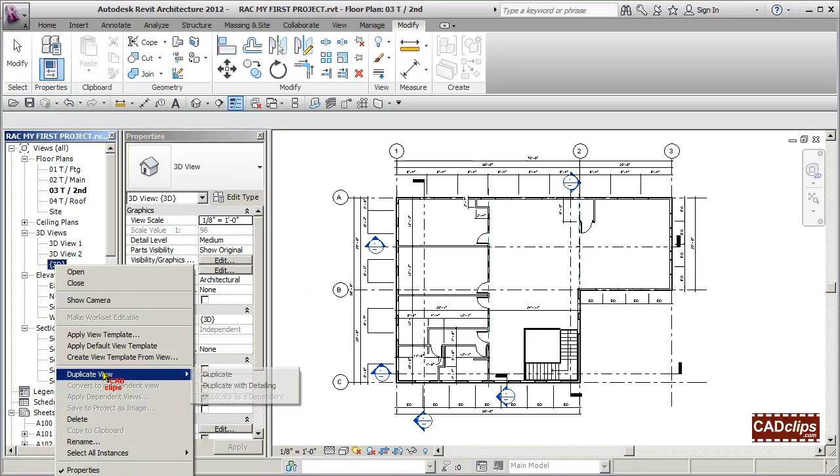We'll right click on this 3D view and say duplicate, just a regular duplicate, and it creates a copy. Let's make another one—duplicate, duplicate. I'll rename this one 3D main floor, which is great for structural and anything else. Really neat stuff. We'll rename the other one 3D stairs. If you double click to open them, they're just like the original view.

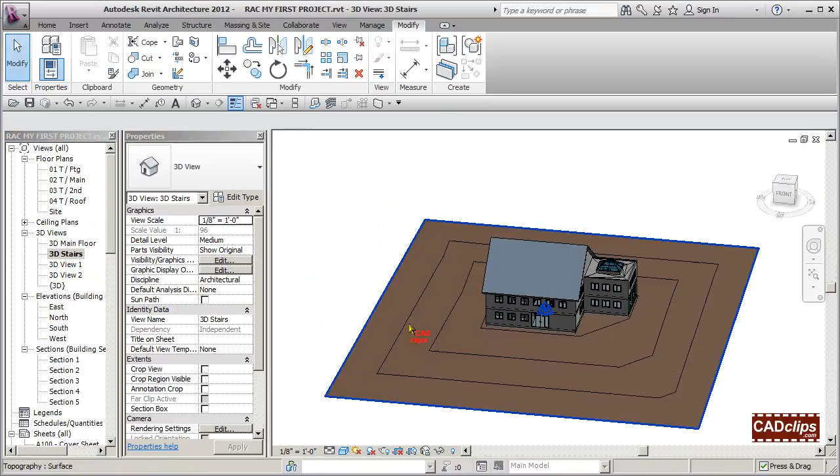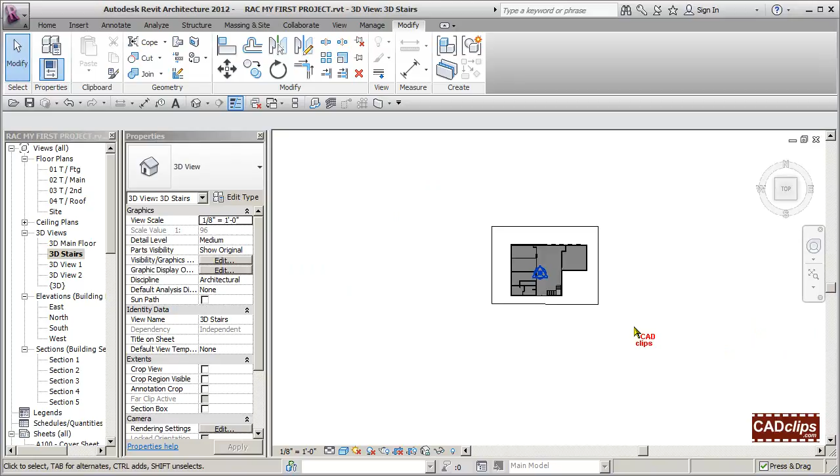Once inside, go over to your view cube, and right on the side there's a sneaky little context menu button. Click it, slide down, say orient view to, then in the flyout say floor plan, and then main floor—watch what happens. Click, and it creates a 3D view of your first floor plan. This is a good way of seeing where your view range is, although it cuts higher than your cut plane, but basically it's a 3D view of your first floor.

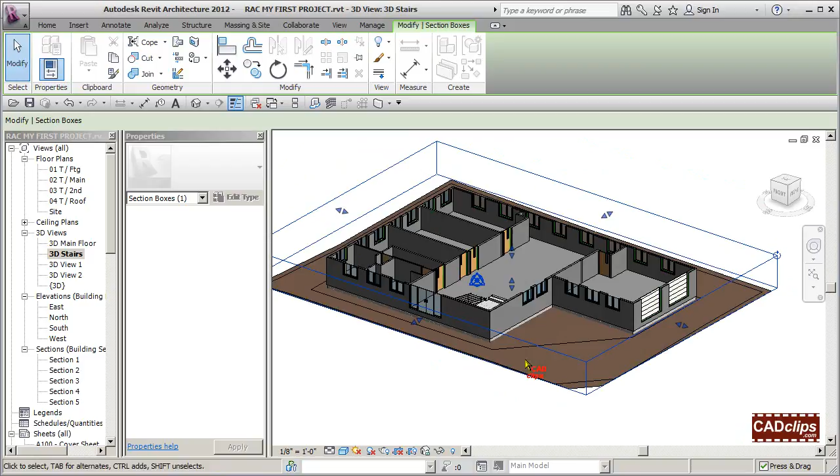Once you have that, you can click on the section box and pull it up and down—it's kind of tricky, sometimes you have to use your tab button. While inside here, it's good to turn certain categories on and off, so I might pick this topo surface and hide the category. Then I can see a bit more, and maybe pull this down to see the foundation, or down to where the beams are. We'll have a follow-up lesson where we'll frame this.

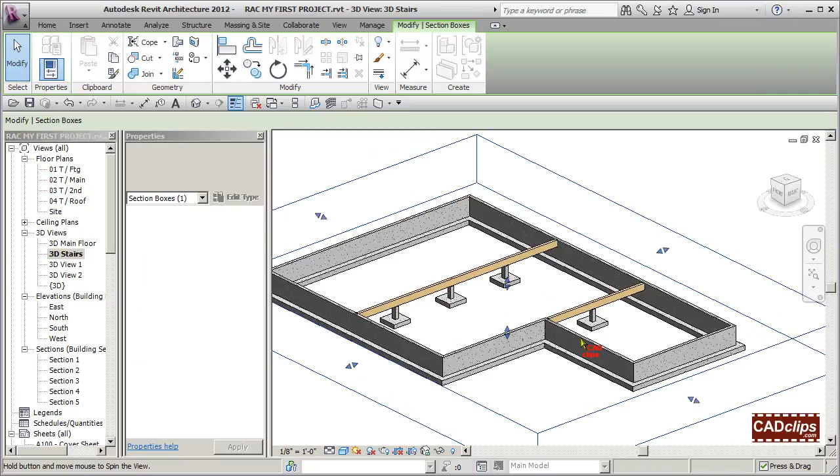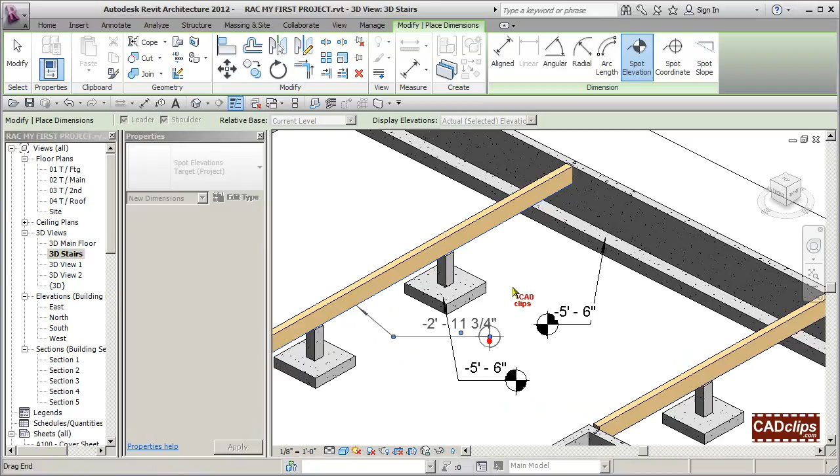You can take this and put it on a sheet. You can also go to annotate and put a spot elevation, marking what elevation this is at, like -5'6", underside of beam. I wouldn't do top of beam because it's probably being clipped, but I'd make sure to pull this up a bit. That'd be kind of tricky—I think that is the top of the beam, so let's go in and find out.

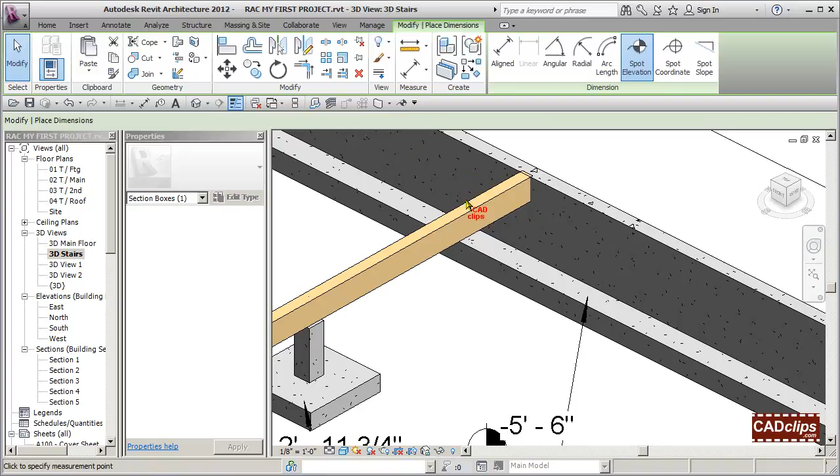Watch—annotate, take our spot elevation, add it to the quick access toolbar, and say top of beam spot elevation. It's not finding it, so it probably is being clipped. I'm actually glad it won't do that, but if you wanted the floor system etc., there are other ways to achieve this.

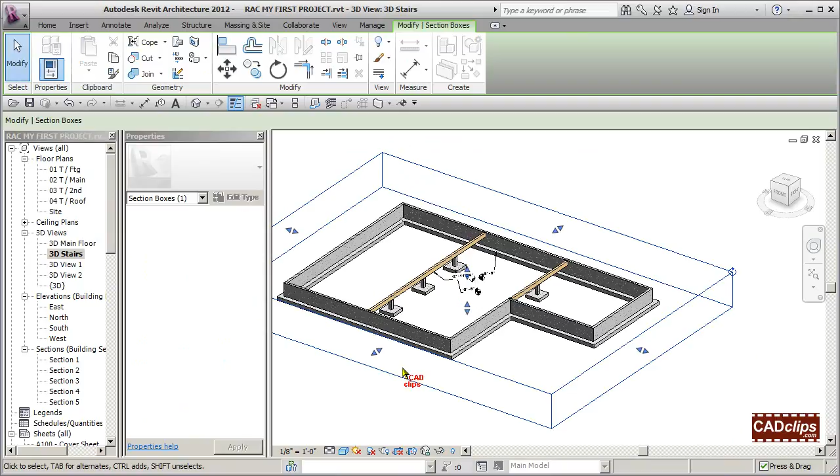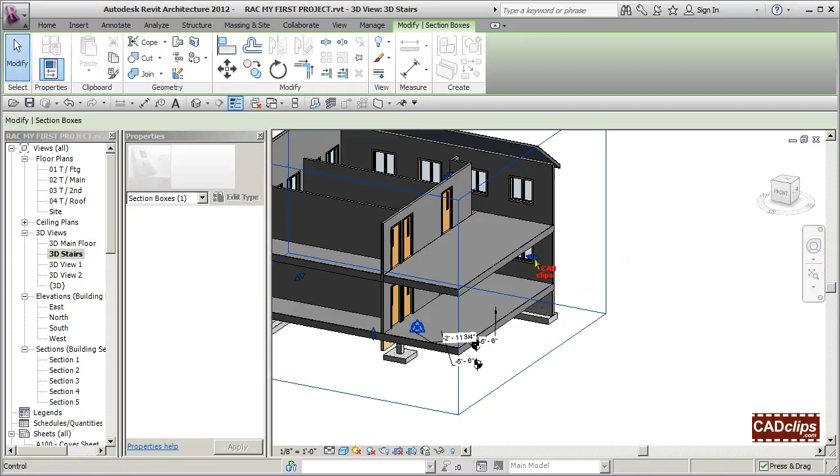So that's kind of a plan view. You can grab this and pull it back and forth, do whatever you want, pull it up—started with the first floor plan, you can turn it into whatever you want. Sometimes you have a hard time getting these grips; you have to use your tab button to find it, but if you're careful you have to pick the edge, then wait for it to say control on your tooltip on the status bar.

Let's go to our next one—oh, that was supposed to be the stair one, wrong one. So how do I get rid of this or clear it? You go over here and turn the section box off in the view, and it just becomes a regular 3D view again.

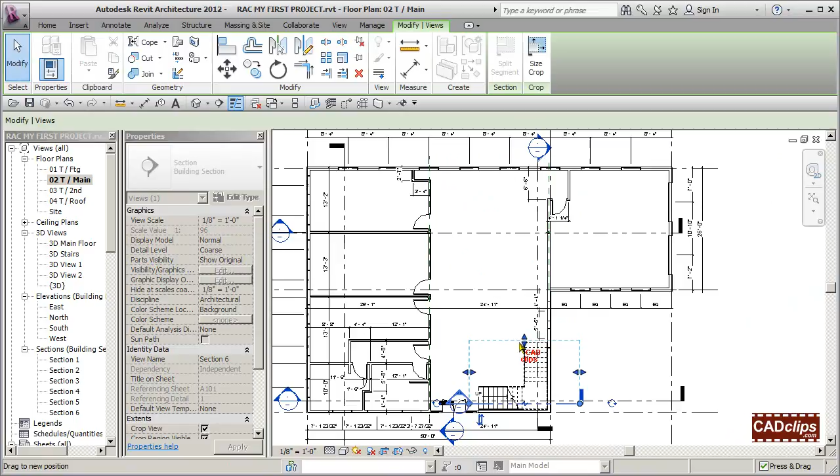Now I'll actually do it the way it was supposed to be and orient the view to a section. Oh, I need a section first—let's go to my main floor and do a little section here. I'll grab my section tool, and let's put it right here, then pull that clip plane back to here—that's going to be the box.

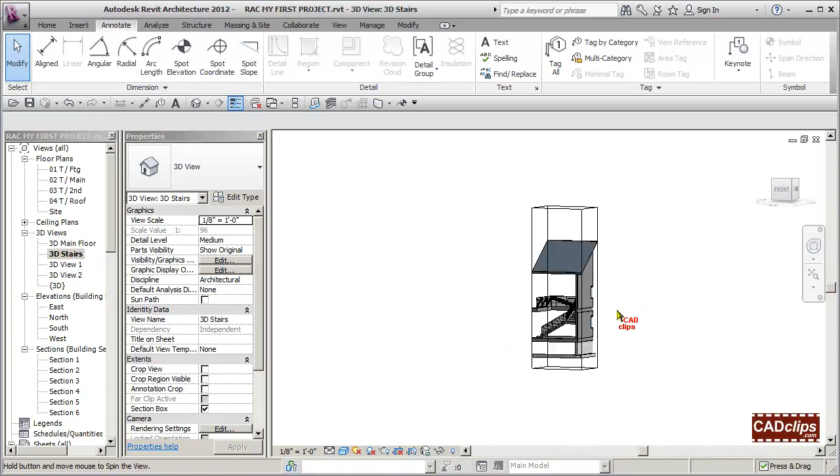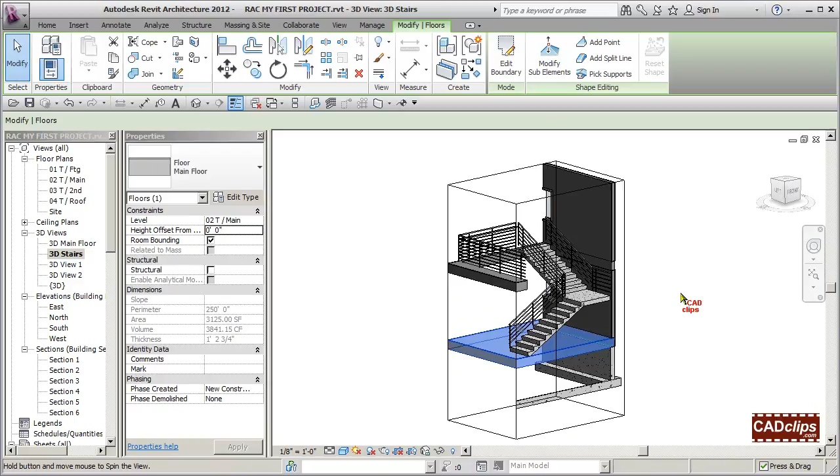So then we go to my 3D view, stairs, and to the view cube's little flyout button, orient view to section—that's probably section 6—and it reorients, then shift middle mouse button, and all of a sudden there's your 3D view. This is good for working out details; you can click on objects and change their properties, move things up or down. Sometimes it's easier to work on things in a 3D view. If you want to get rid of it, click here to remove the section box, and it's back to the original 3D view, treated accordingly.

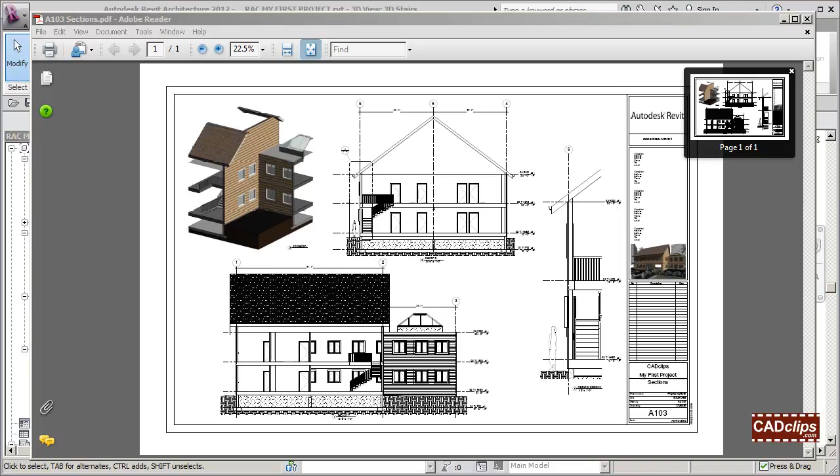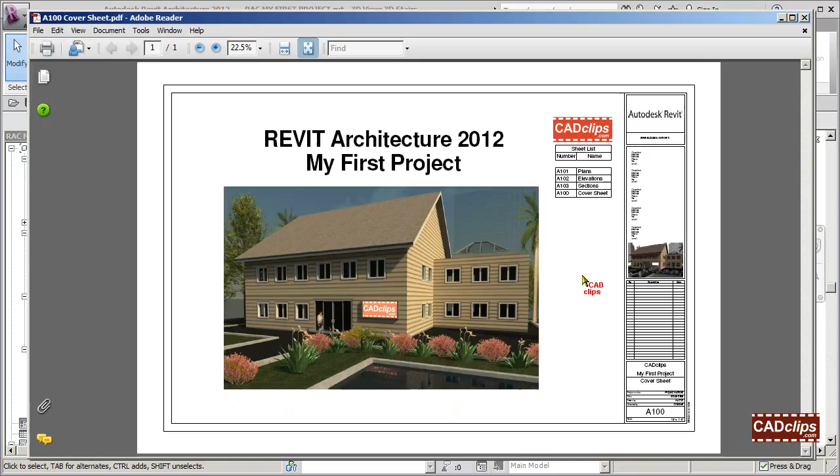These views can be placed onto sheets, which is pretty much what we have on our sheet over here—that's exactly what this is. So we've decided to put together a quick check set in our next lesson and populate our sheets to make sure everything's set up. We'll put a perspective view on here—we don't have anything rendered yet—but we'll add text, a logo, and a sheet list, and put all our views on our sheets. I think they're pretty much there. So our next exercise: getting a check set of drawings ready and printed.